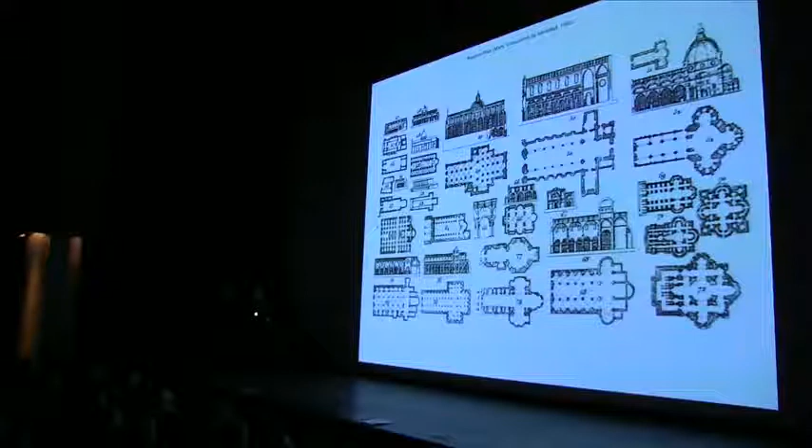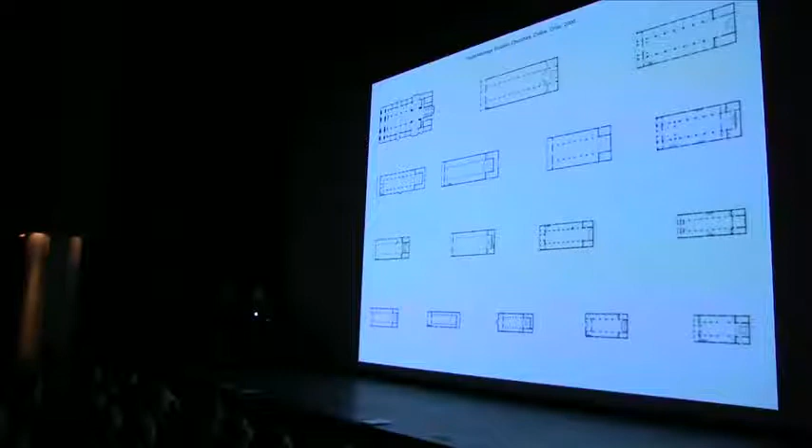And structures that are more about relationship than the shape in itself. Considering that space doesn't have any value in itself, you can define a specific structure despite the resources or the lack of resources.

And in theoretical terms, that's something very connected to a more topological understanding of space. So it's not descriptive, it's not analytical, but basically the definition of a relationship, which is very much part of our understanding—this childhood, or infantile, understanding of reality.

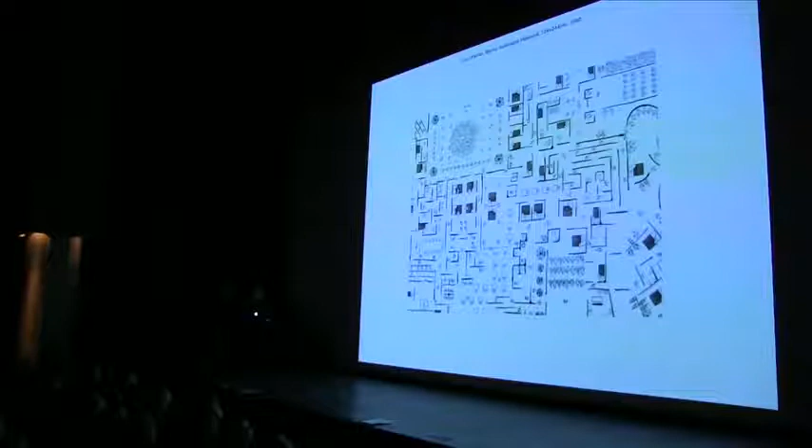For example, this is a fragment of a work by an Argentinian artist, and we would like to depict our project in this way, because there is a clear coincidence between the method of production and the subject being depicted. There is something very precise within the informality, and perhaps this conflict between what is defined as form—which is something very rational—and the irrationality of the occupation, similar to the image that Kirsten was commenting on.

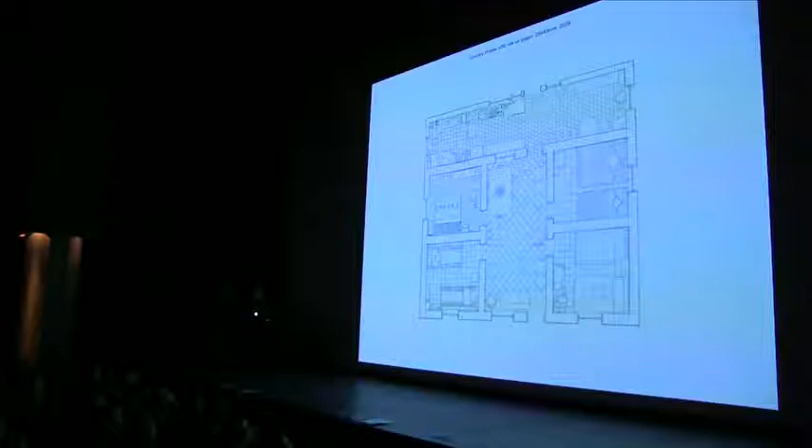What we call the New World is a superimposition of lots of influences. They're all simultaneous, they're all as important, and they're all coexisting. So we're always dealing with this. You Europeans are very lucky because you have grown those models over time.

Or the opposite direction, which is a bottom-up translation, where we take images from precarious contexts and have students in the United States learn from a new set of values that they don't normally work with. In this case, this is an exercise of documentation of domestic architecture of living rooms.

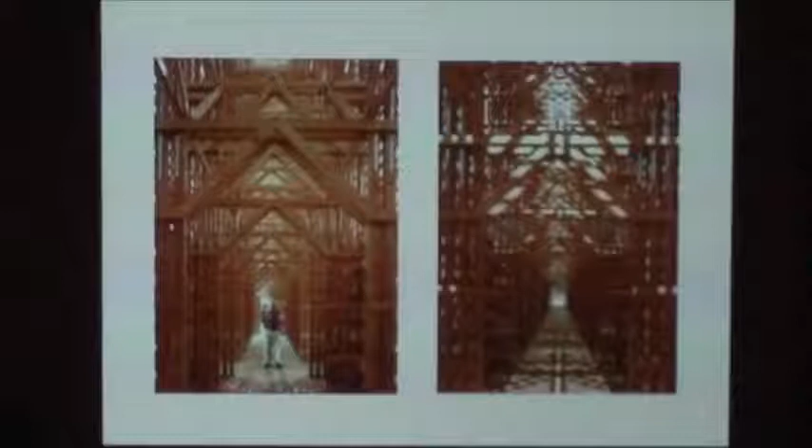The structure is organized in 5 levels, decreasing as you go up, and it was all covered with the same texture and some stones in the base that make it very, very stable. It's a very perfumed and shady corridor, almost a chapel-like interior to cross the highway.

This is a more recent construction in London. It's an exhibition precisely about architecture, paradoxically trying to avoid the representation of architecture in a place that is very representative in itself. So our proposal is...

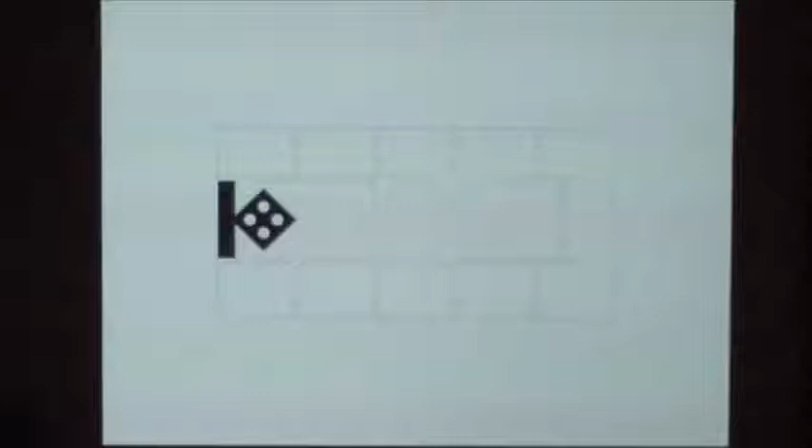A very primitive building type: a series of cylindrical columns and a horizontal plate, a mixture of a hut or a belvedere, a baldacchino, with a minimum amount of space between the legs. It occupies one of the largest rooms in this classical building, with a very simple alignment to the central axis - an object very compact, with 4 columns supporting the horizontal plate.

Inside every column there is a staircase, so you can access the platform through these spiral staircases, and there is an additional circulation, a promenade against the back wall. The piece is rotated in relation to the rectangular room, creating a distortion of the perspective, but also a distortion of the scale of this object.

Once you are on top, on the platform, this is a hidden space, a hidden room, where you're in connection with the vaulted ceilings, the skylights, the angels and the decoration on top, with no relation to the lower stratum of normal movement of that gallery space.

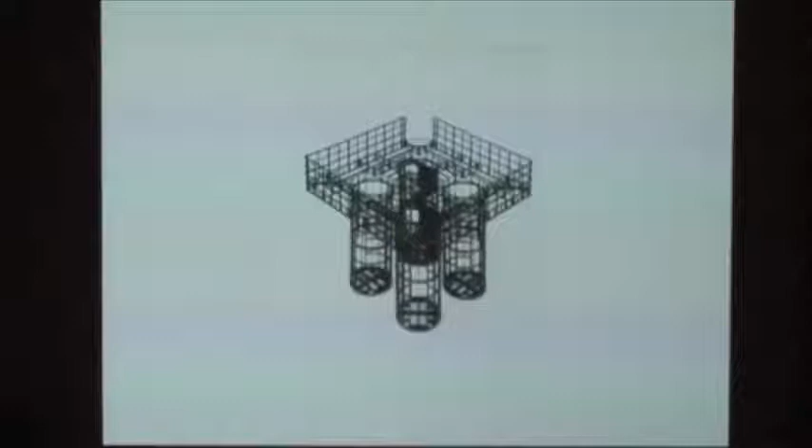All of this was prefabricated with pine wood, simple wood, in Chile. It was then shipped in 2 containers, and we went with the same carpenters we always work with to assemble it in London. So it was a non-fictional assembly - exactly as if we were building a house in Chile.

It was not representing anything scenographic. It was in itself a house within the museum. Then all the efforts are hidden - it's all covered with boards, simple pine wood, and doesn't show any indication of actual scale or effort.

It's a simple action, a repetition of a minor gesture. We're trying to avoid this notion of a grand gesture or a partie, or anything that can predefine the execution of a work. So finally, the work is an addition of tiny and almost minor decisions that are then interrupted at a certain moment because of something that occurs.

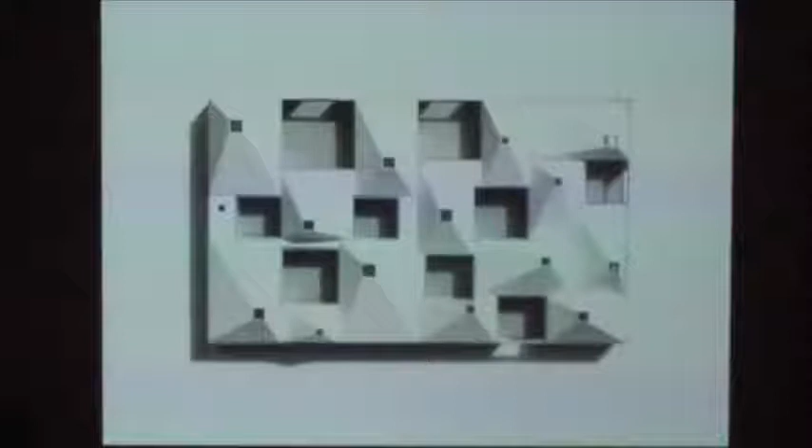So it's a large house, but it's actually the addition of small individual rooms, some of which happen to have a roof and some don't. So they capture in those patios existing trees and existing parts of the garden. That creates a sensation of sequences or alternating spaces inside the house that are always interior, exterior, interior, exterior, and give a larger sensation of space.

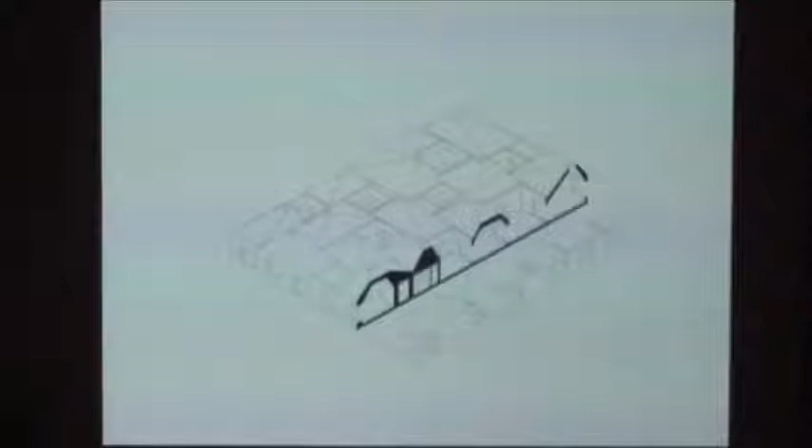And that sense of generosity as well, it's in the section. We increase the height of some of the rooms, so they are equivalent to two stories, but then in order to avoid casting shadows in the patios, all the roofs descend towards the patios and towards the exterior perimeter. So there is an articulation of two geometries, the geometry of the ceiling and the geometry of the roofs, that are adapted to the furniture and the different activities inside. So that creates a very varied temperature of light inside at the same time.

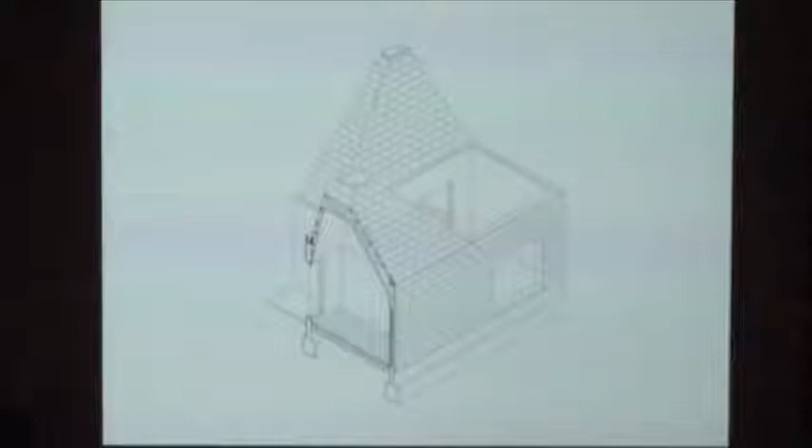And then within the house, all the different geometries are unified by this blanket of tiles that are just on top, and that were placed very rapidly. The only handcrafted part is the joint in the corners, where they were just cut.

And this is a bit the way we work, which is with a criteria. This was the only plan that we had on site for the carpenters to build the trusses. So they knew the criteria, they knew the levels that they had to reach, but every single truss was then different and was entrusted to the carpenters.

This is a drawing that was a documentation. Once they were built, we sent a German intern to draw what they had built.

So the elements of the project are this fence, the brick fence, the tiles, the green nature in between or inside the house. And then we received a drawing made by the owner's son, and we were very fascinated by the precision of his perception and his mental image of his own house.

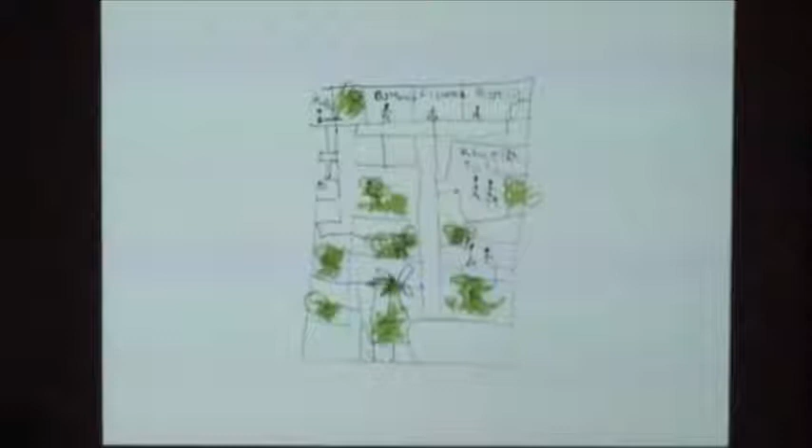So we have been for a long time trying to understand this conflict of up to what point architecture can be abstract and an artifice, an invention, and at the same time be perceived with a certain degree of naturality, or as something very familiar and easy.

This is a project we did very early in our practice. It's on the coastline, in a peninsula that runs parallel to the continent. It's running north-south. The project is located to the west, facing the open ocean, as a final point of a natural promenade. So the site is surrounded by water on 3 sides.

So the building is a very compact piece, almost as if it was abandoned there. But it occupies a very precise position, far enough from the edge to be on safe ground, but close enough to the edge to be able to look down and see the rocks and the waves.

The plan is organized: it's a double perimeter wall and then a cross inside. And this is so because it is both a private house, but it's also a small cultural center that receives artists in residence who stay there for a while. So it has this function that has to be somehow more domestic and other times more neutral.

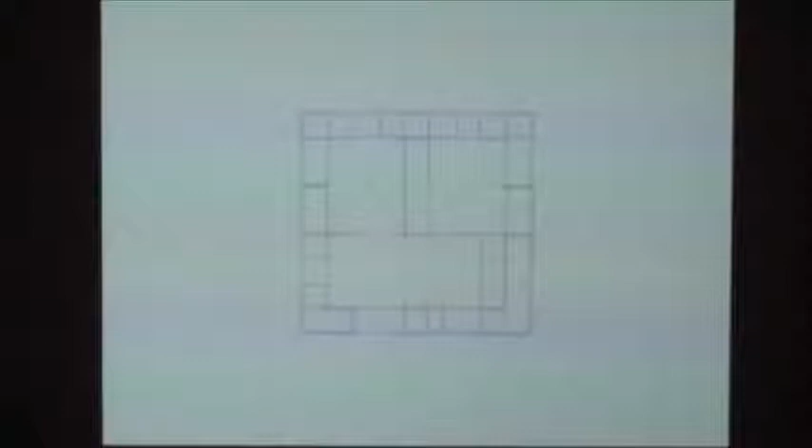In that perimeter wall, in that double wall actually, you have all the programs that are kitchens and bathrooms and closets, but also more architectonic programs such as staircases or balconies. And that allows for the center space to be freed — everything can be stored in that double wall.

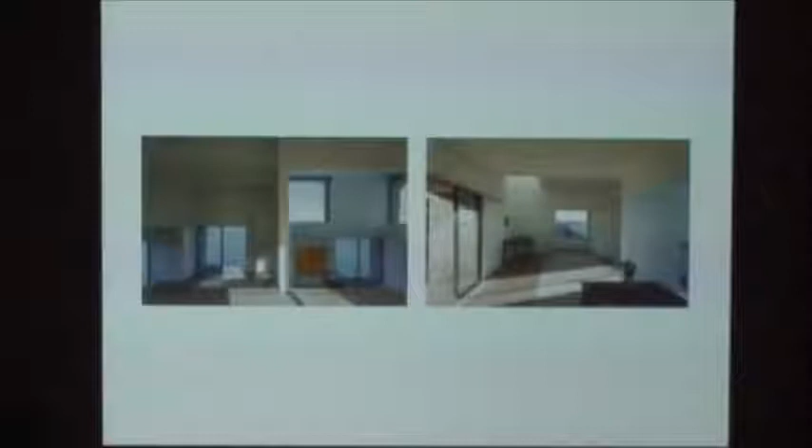So there's a very different perception of the thick mass created by the double wall, and then a very informal interior space in between that has always cardinal connections across the space with the landscape, but also, because there is a difference in the levels of the floor, it connects diagonally to some vanishing points with rocks or with the coast around it.

So the surrounding landscape is really a reconstruction of fragments, a mental reconstruction, as you go through the house.

There is perhaps an obvious opposition between the abstract geometry of the piece and its wild nature, and a certain continuity between the granite of the rocks and the concrete. But we were interested in this cubic format because of this sensation of rest and gravity that is very attached to the ground, as a positive piece in a negative, or the opposite, a negative piece in a positive landscape.

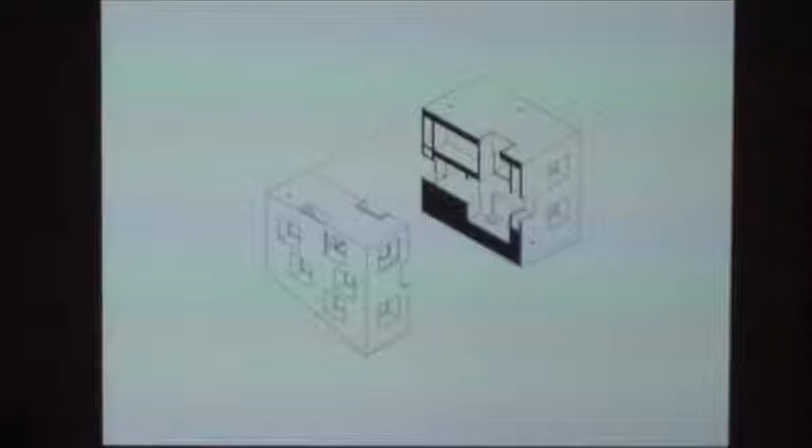Without any mediation, it's directly transferring the loads to the ground. Inside this monolithic and compact piece, there is a continuous vertical space, a void that functions as a pivoting point, pivoting room for the interior, and it somehow captures a sense of vertigo of the cliff. It was built very, very simply.

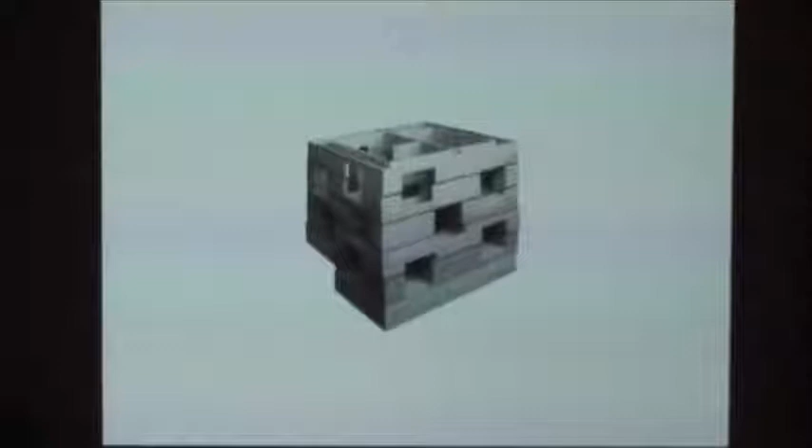This is a very ugly model, but we like it a lot. And it's essentially 7 stratums of concrete that were poured simultaneously. It was built by the local fishermen and farmers, so it was a technology that was absolutely nothing new, all with wooden formwork that then was recycled and used inside to cover the first exterior wall with a little bit of insulation, and then just white paint unified all of the interior.

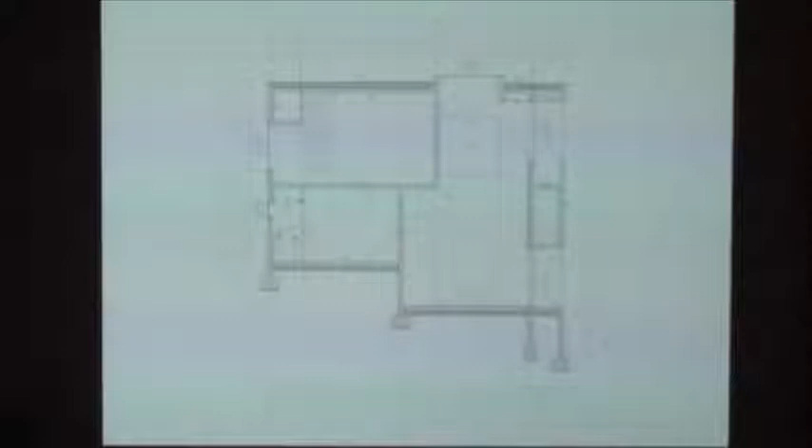So it's just 15 centimeter thick concrete walls and slabs, and then 2 very simple details: windows that are flush with the facade, and others that are receded and create protection from the wind in the winter, but also balconies in the summer. It works really well as a residence. It's already building a collective memory in the area, but it also introduces a human scale to that context. It's a very idyllic context.

Something that we have been exploring also with more suburban houses and much less idyllic contexts. These are houses that also explore the same notion of seclusion, compactness or autonomy, but trying to capture a little bit of the everyday beauty that you can have around them.

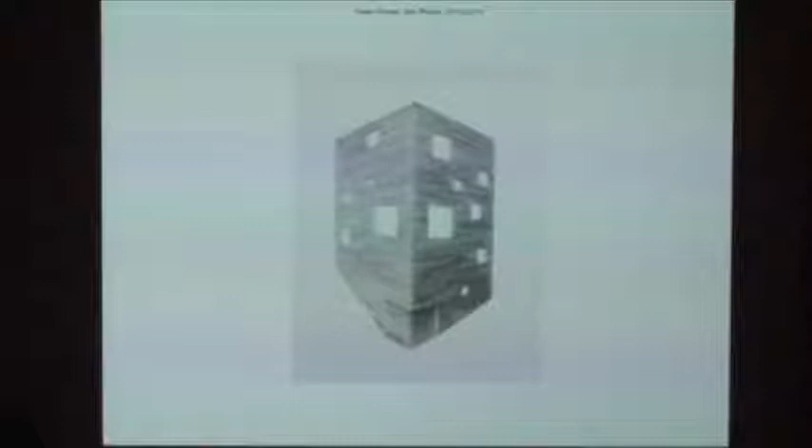So in this not so idyllic context, our position is very simple. It's basically the definition of a perimeter, of a line that defines a degree of transparency, and it's somehow elusive in the way of almost as a mask for what the interior space is. And this is connected with a series of portraits we're doing, which are a single line that defines the profile of a head, that then is repeated as an offset.

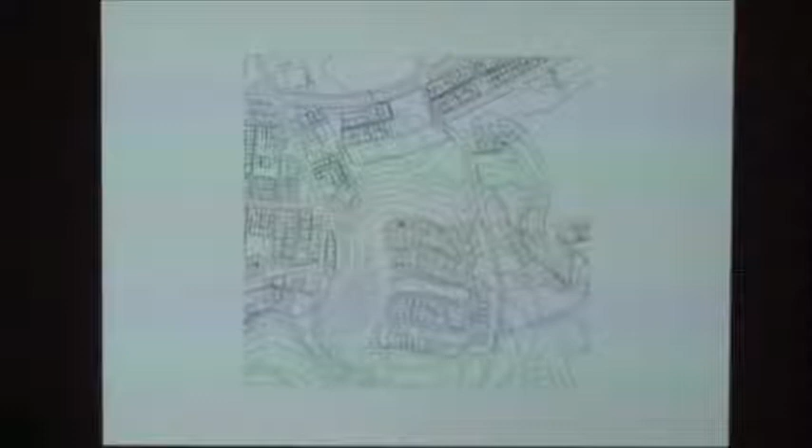And we find that in a suburban area, the limit that surrounds the interior is somehow doing the same function. So the context is very generic. It's this brand new suburb in a brand new city. It's just a topography without any tree. And the house is a compact piece, a 4 stories wooden box, very closed and somehow hermetic to the surroundings.

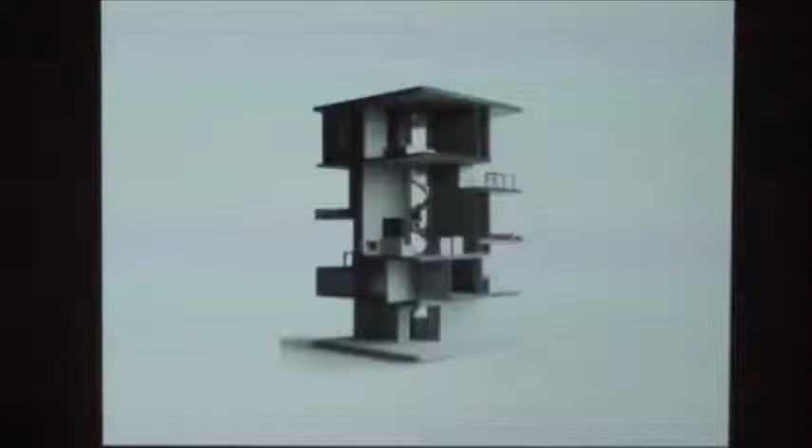But that compact figure is completely different inside. It's 15 platforms that rotate around the center. Each one is separated 70 centimeters from the other, so that's 4 steps. And it has a plan that is organized. Of course, here you see only 4 plans, but it's actually 15 different levels, which form a cross, an asymmetrical cross that holds all the fixed functions.

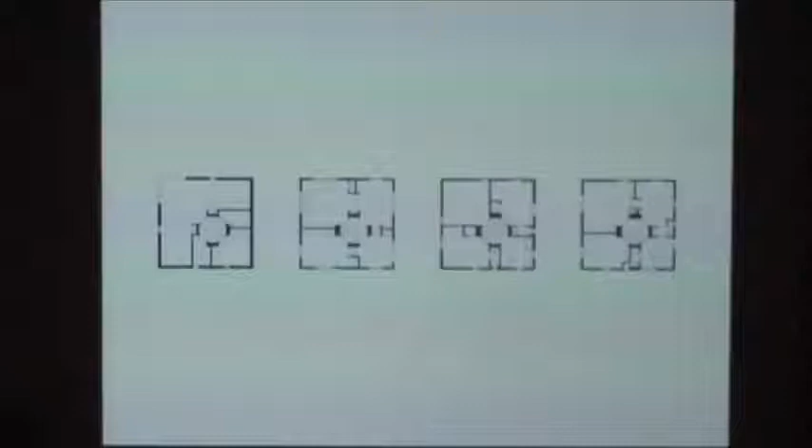And then at the crossing point of that is a staircase that connects all the rooms. So that staircase acts as a central core and an access to every room, but there's a secondary circuit you can take through the middle point of the room. So there's a short promenade and a longer one. And that same staircase allows for different views of the different levels, so you can connect diagonally through the whole volume of the house and have a perception of a larger house than it actually is.

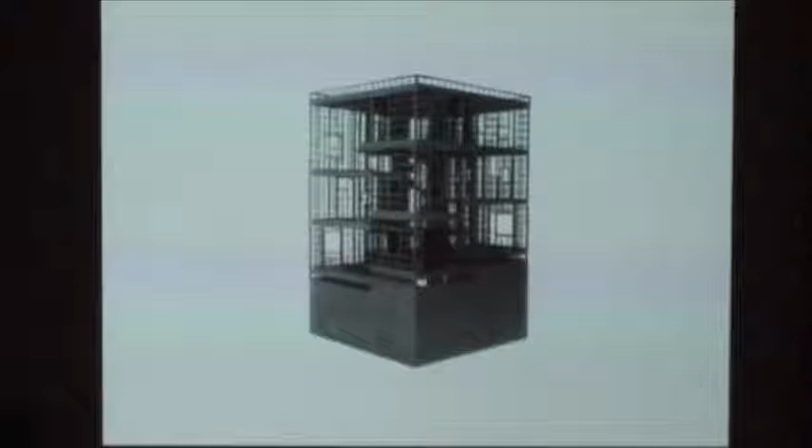The construction isn't so complicated. In fact, it follows the form. It's a balloon frame construction with a concrete core for the staircase. It's a monolithic piece of in situ concrete for this spiral staircase that doesn't have any landing. All the steps are exactly the same, so the staircase occupies exactly that center point, and there's also a void in the center with the total height of the volume.

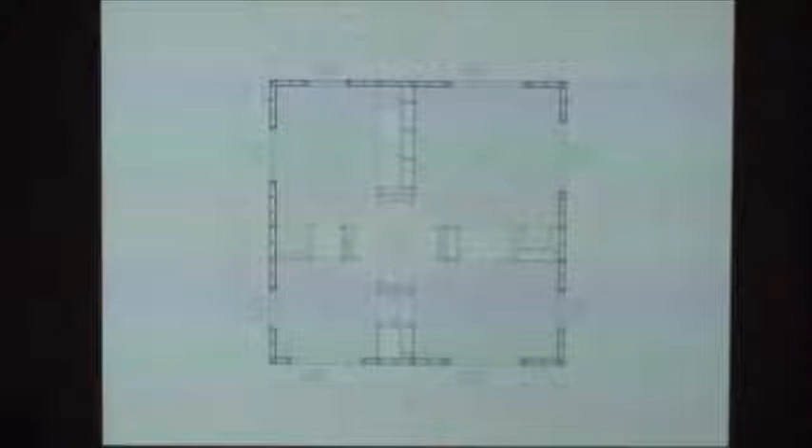Everything is made of wood, so the rooms are almost a continuous furniture of untreated pine wood. The same happens on the outside - it's a ventilated facade, in this case just impregnated wood, standing there on some leftover site, as opposed to the other houses, which are the same size but very obvious in their functions. They're very transparent about what is happening inside them.

This following project is more not so invented, but more dramatic. It's a project for some friends who lost their house in the earthquake that we had in Chile. It was very delicate because we were asked to do a reconstruction that was material, but at the same time a mental reconstruction, which is something very demanding, to have that kind of questions and dilemmas at the beginning of a project.

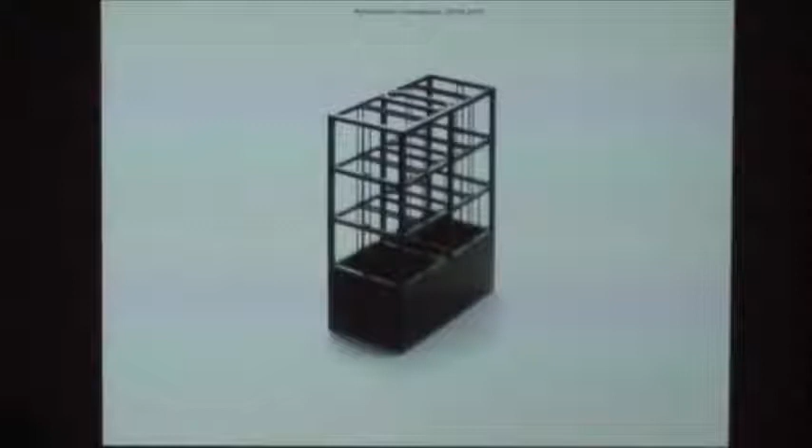So the construction is basically the structure that is there as an exposed finishing, in a very simple and stable manner, almost as if it confirmed that famous sentence by Simmel - architecture considered as this meeting point or equilibrium point between the human forces and natural forces, which are different vectors.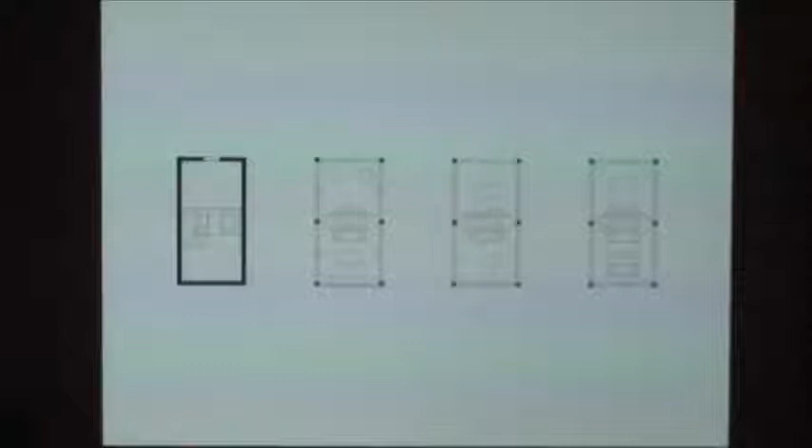It's 8 equivalent rooms - 2 of them are in a blind podium that takes the topography, and then 6 of them are in a crystalline tower. The staircase is linear, in the center, and connects all the levels with absolutely no doors in between.

So in the very narrow spaces, the privacy is regulated by a couple of layers of curtains. But what we like most is that when they're completely open, these curtains replace the black bones of the structure with these soft pillars of cloth. And the structure doesn't show any effort.

The columns and beams are exactly the same, 25 centimeters in steel, but there is a physical condition - they are different in every level inside, because the thickness of the steel is different, going from 10 millimeters, to 8, to 6 millimeters. So there is a real entasis inside, but it's not visible.

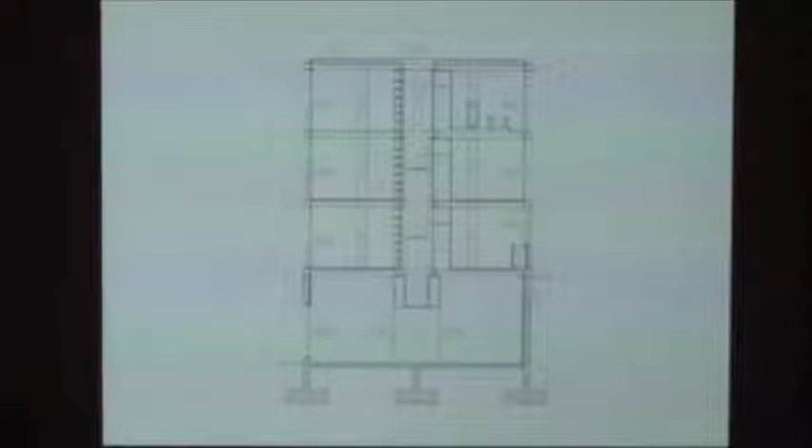The construction is very simple: a steel structure with 5 centimeters of wooden floor without any structure, and then a couple of details for the openings, made in situ with steel angles for the fixed panel and the pivoting panel. Everything is painted black, the concrete and the steel. So it has this infrastructural presence, with elements that are perhaps too thick for the size of the house, or too slender for concrete. So it's very undefined.

The next project deals with something much more internal, as an internal problem - basically the systematization of a geometrical rule, which is the implied diagonal in an orthogonal system.

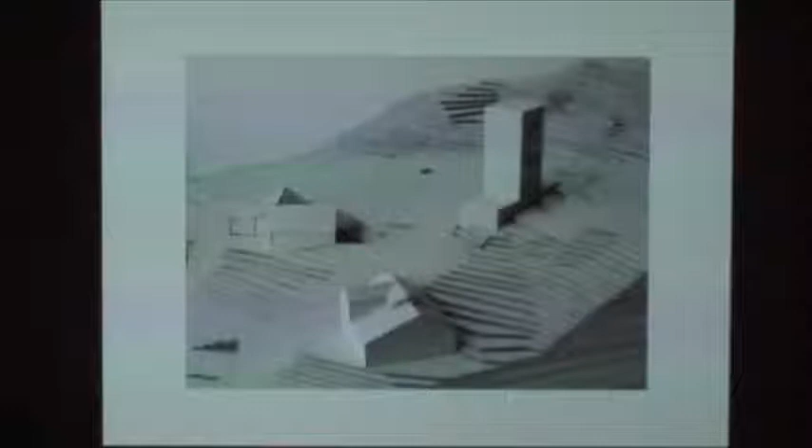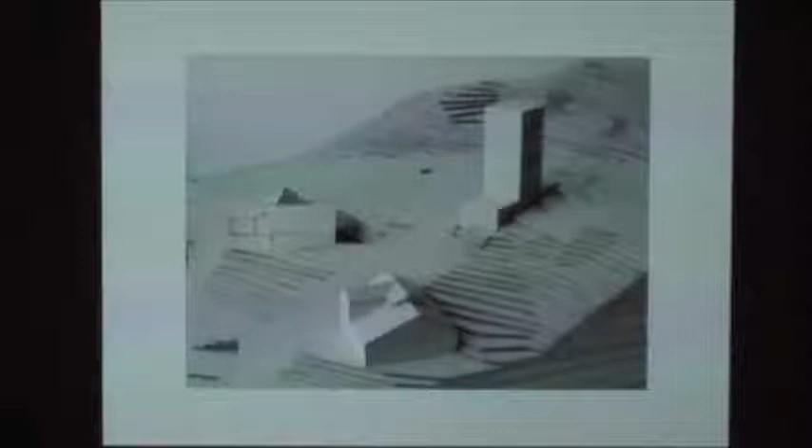The house that Sofia was just showing can be explained maybe with 3 coincidences that we like. One, you enter from behind into the house from the street, and there's a long staircase there - that's the first thing we liked. The second is a coincidence with the levels - it's called Cien House, 100 in Spanish, and the podium is exactly 100 meters over sea level. The third coincidence was a very beautiful old cypress tree right next to it.

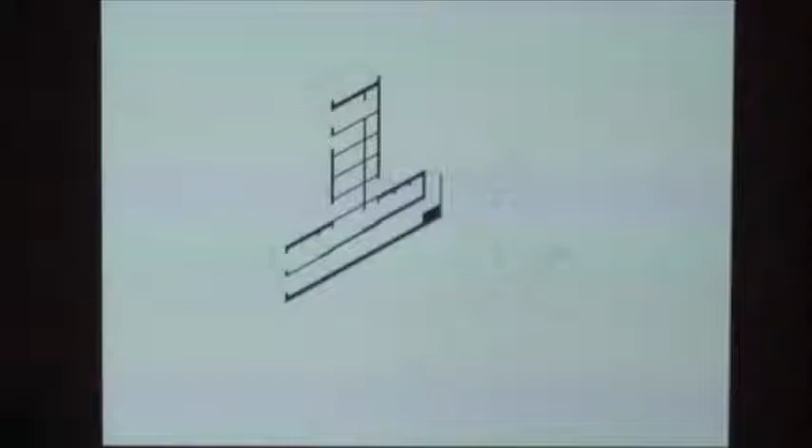It's a building that articulates two formats - a vertical and a horizontal, a tower and a podium. They're fused, so the podium is very much in relation to the ground and is an extension of it, but the tower on top has distant views all the way to the ocean. It also articulates three programs: a workshop in the lower level, then 3 levels of a house, and on top 3 levels of an office and a terrace.

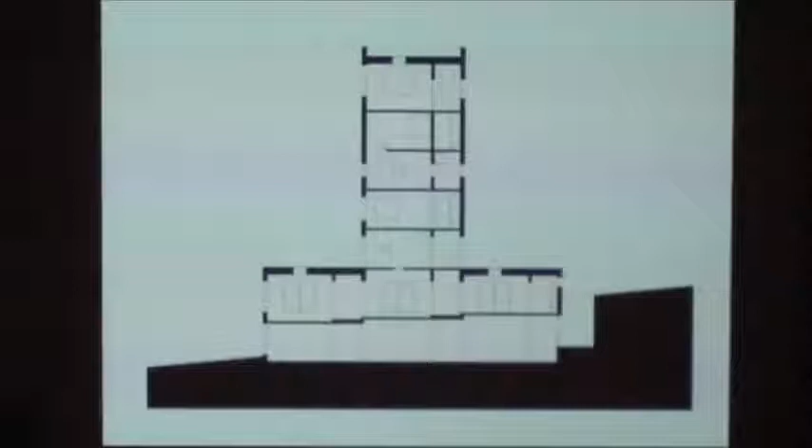There are two independent circulation systems. One goes straight from the street at the highest point up to the tower, to the working space, and another is an exterior staircase that goes down and connects internally the house with the workshop in the bottom.

All the staircases are really shortcuts, extremely efficient, and ironically it's cypress stacked up, as if we're dialoguing with a cypress outside. But it's with no rails—actually the center core is the rail to the staircase.

The plan of the whole house is a systematization of that Euclidean geometrical figure, which is like this asymmetrical cross in a square. So it's a repetition of 12 times the same figure that is then diluted by pragmatic reasons. In the podium there are 6 modules, and in the tower 6 modules.

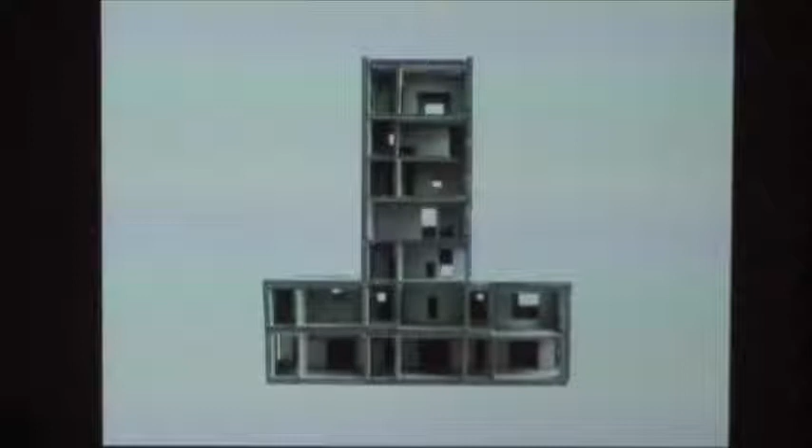Since the topography is left untouched, the total amount of levels is visible in the back garden, and from the street it's totally hidden.

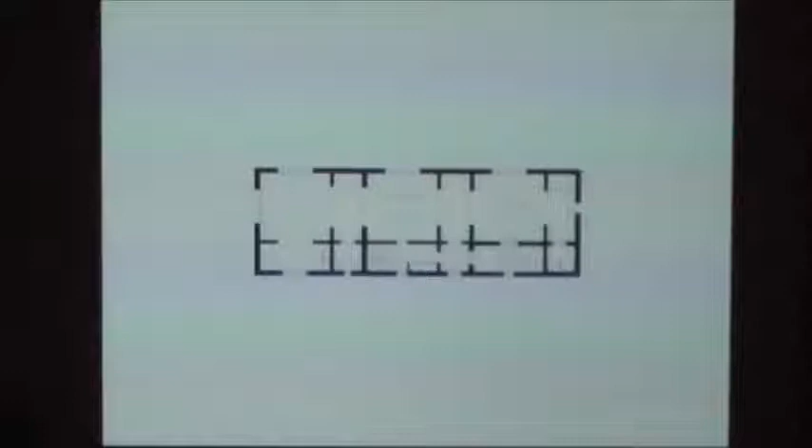That's the social area of the house, and you can see 3 modules there in the floor plan that are open in the center, with the openings aligned. Since there are certain steps, the openings are different in one extreme and the other, and that creates a subtle distortion of the depth of the perspective.

As opposed to that extended floor plan, the tower is extremely compact. It's the same structure, but the relation of the spaces it articulates are always different. If you look at the last 3 floor plans, the first one has a diagonal connection from the staircase across the totality of the volume.

The next one has the longest possible path along the edges, or the top one is connected cardinally through the space in the center of that main room.

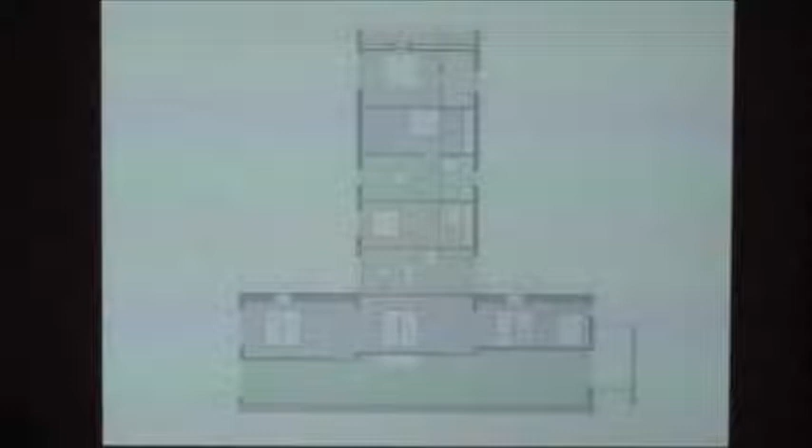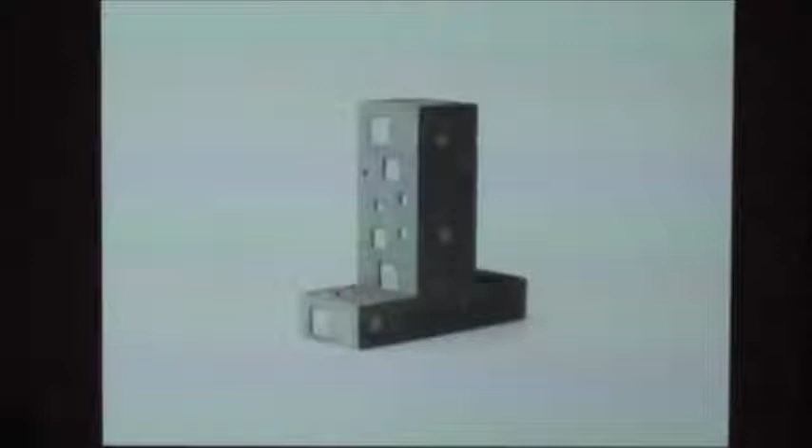So it's a concrete building with a wooden house inside, all covering the walls. The outside is a monolithic concrete poured in situ. What we were interested in were the levels of concrete, not the texture of the formwork. So a slight demolition gives it this quality of very soft edges.

It occupies a peripheral situation in the city, but it also has a diffuse presence. It's maybe too tall to be a house, but also too small to be an office building.

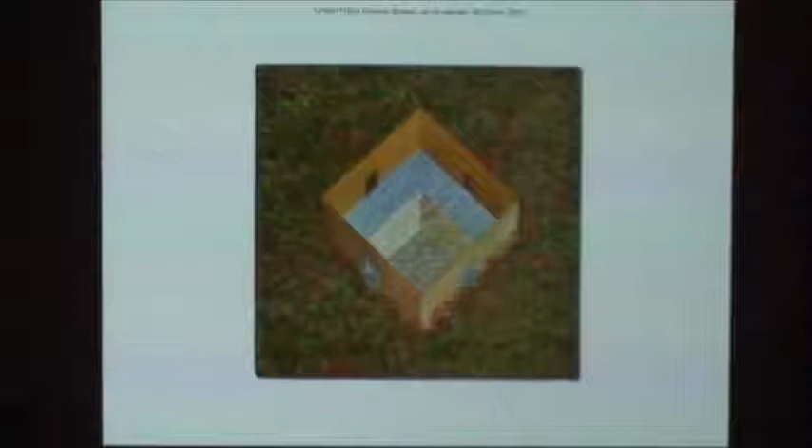This is a more recent project. We were painting this at the same time, and we find a perhaps beautiful connection between the painting and the project, because there is a degree of autonomy of what is depicted in the center, with the symmetry and the regularity. But at the same time, you cannot understand it without the context, the specificity of that relationship.

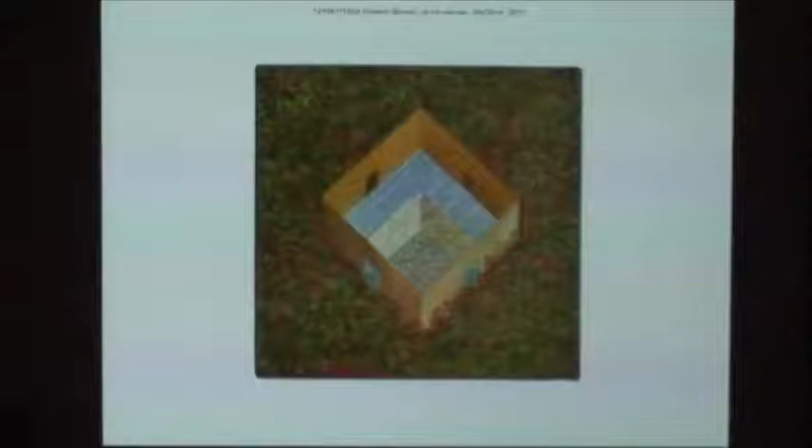It is a house in Spain, on top of a hill. It's a very gentle hill, and there is a very precise definition of the way in which you approach the piece from the foot of the hill.

There is the parking, and then there is a linear ascension from one moment to the final destination—that's the house on top of the hill. And as you can see, it's all covered with a dense forest, so that ascension occurs under the trees, in the shadows.

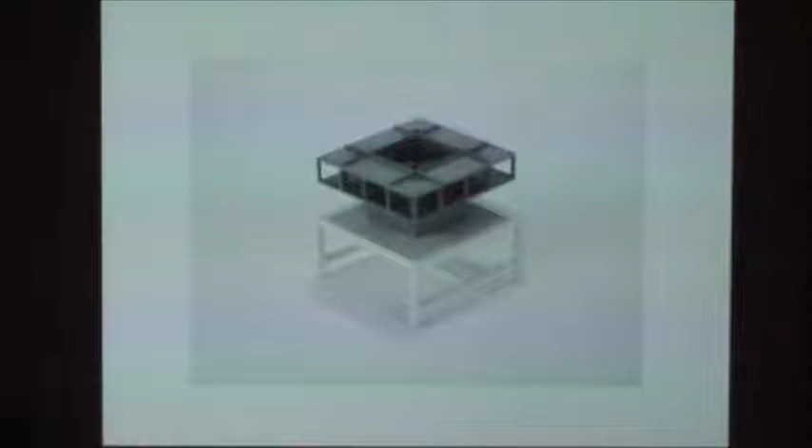And somehow the house is the end point of a journey. So it's at the same time a suspension, not only of the piece in its relation with nature, but also there is something with the temporality of that linear experience and then the centralized experience of the interior.

That's the final point of that arrival, which is very demanding, especially after 100 meters of a staircase. And then at that point you have to make a decision of entering by the corner, and there are two doors that arrive at the same place.

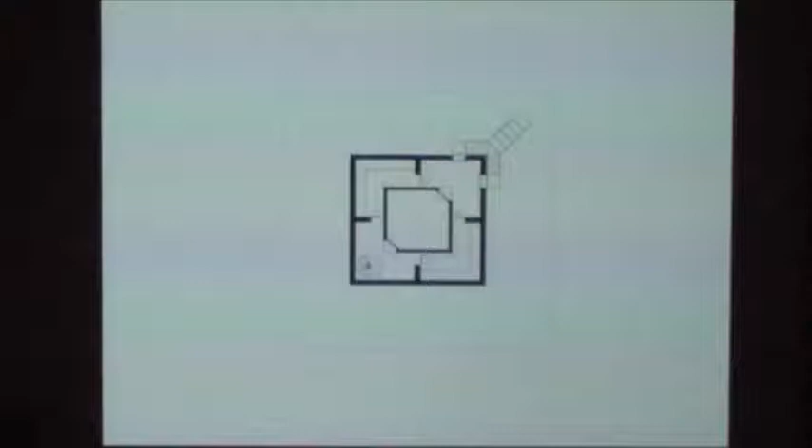There are two windows in the swimming pool, in the volume of water, so the light inside this cave-like space is almost blue and green. But also, as you go through it, you suddenly encounter in the water, in a voyeuristic way, the bodies that are submerged of other occupants in the house. And the format of the house is very schematic.

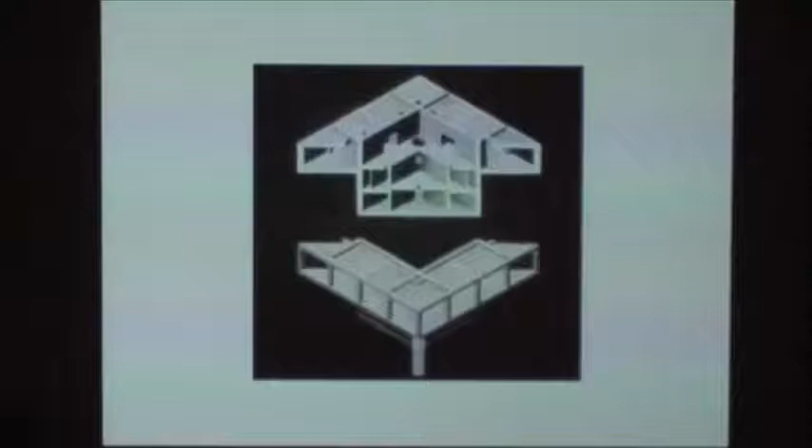It's a blind podium with an open and transparent platform on top that contains a patio, an open room that has the same size of the podium. The floor plan of the platform is basically a centralized structure with water in the center, a spiral staircase in a corner, and a very closed room in the center with punctual openings.

The perimeter is basically punctuated by 16 columns. So on every side there is a room, an independent room that works as a pavilion, as a glass pavilion.

And in the corners there are protected terraces in every one of the four corners. So the only proper room of the house is the patio, but obviously it doesn't have any roof. And the access to the pavilions is through a thick wall.

It's perpendicular to the landscape, and the pavilions have this proportion that can be extended to the corners with the thick wall that is lateral to the central patio, as a functional width.

So we could understand this house as a panoramic rotonda. It's equivalent in all its sides, so it transforms that linear voyage of arriving to it into a three-dimensional sort of experience of the landscape around.

But also the activities within the house can move and follow the sun or the absence of sun, depending on how people want to live. They can occupy the four corners of the four pavilions and shift around the house.

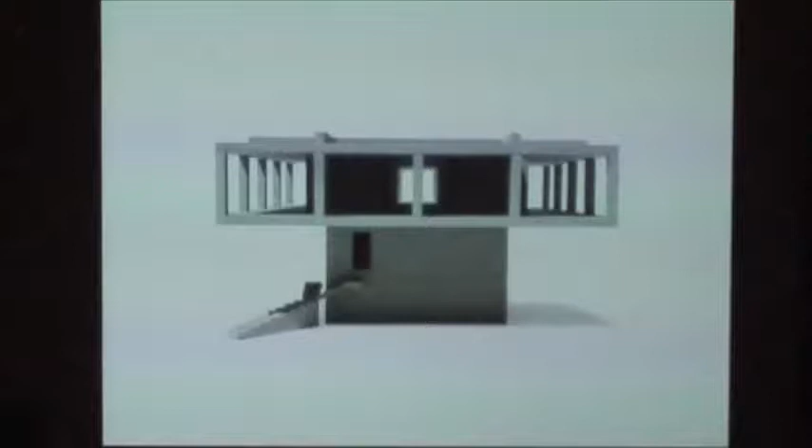That space around it is very narrow, so it's almost like a balcony. It is pushing you outwards, and that happens in an even more clear way.

Those big panels of window can slide and invert the relation of what is interior and what is exterior. So the corners can be closed and the center pavilions can be open.

That's a technical floor plan. The only distinction in material is that the courtyard has Portuguese tile and the rest is a very simple concrete floor. But it's all in situ concrete.

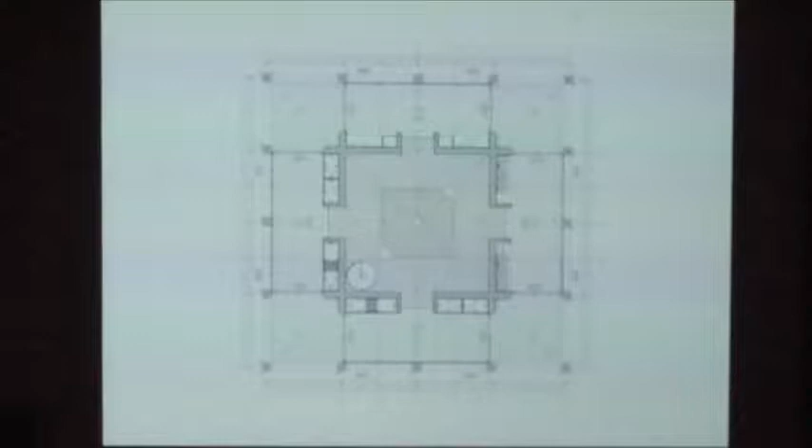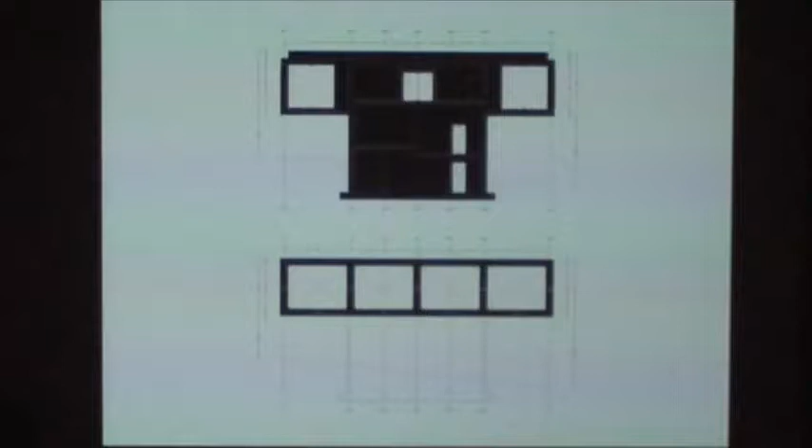What helps all of this rotonda cantilever is actually that the walls of the patio are extended and they make these Vierendeel beams on the four sides. So actually, when you see this pillar, it's not actually a pillar, it's actually a tensor.

There is inside a metal structure that pulls all the forces upwards and back into the courtyard and down into the earth.

So the house is floating, suspended in the landscape with the company of this old tree. And we're always very aware of these invisible things. We want to, in a way, understand that there is a physical presence of things, but there's also a mental aspect of them. And hopefully we try to connect with those two aspects in the work we're doing.

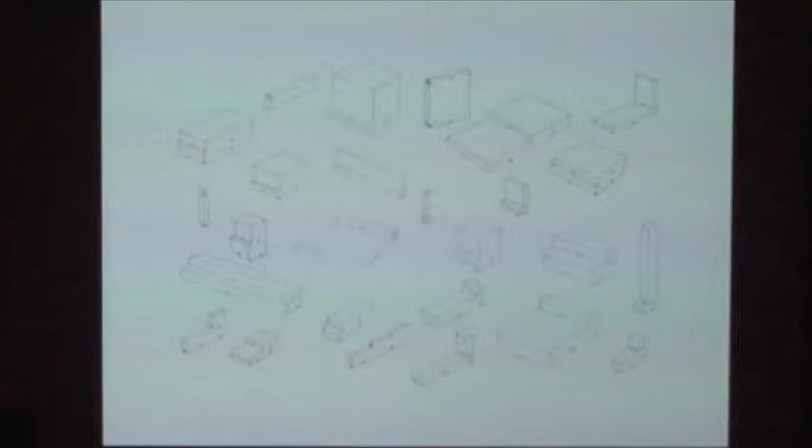And this is a current project. We're working on a series of paintings that in fact give the name to the lecture. We're really fascinated not only by the notion of format as a method, but by the notion of limitation, of something that is finite, in terms of being able to restrict the amount of formal attributes of the elements that define the spatial structure. So it's basically a series of studies of basic forms.

In this case, for example, this L shape with 7 openings and with rectangular or square openings, with 5 sides, with 2 levels. It's so simple, but we wanted to know how different and how diverse the same figure could be.

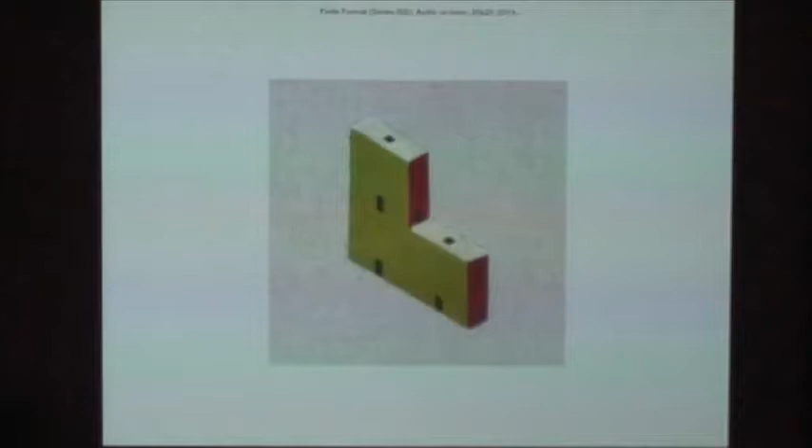So now we are working on, it's maybe a very obsessive and alienating procedure, but we're enjoying it, on establishing in these very simple figures a format that is based on, well in this case, 5 factors and 3 positions.

So actually we are mathematically exhausting the possibilities of this figure. In the case of these 5 factors and 3 positions, the total variations we can get is 243.

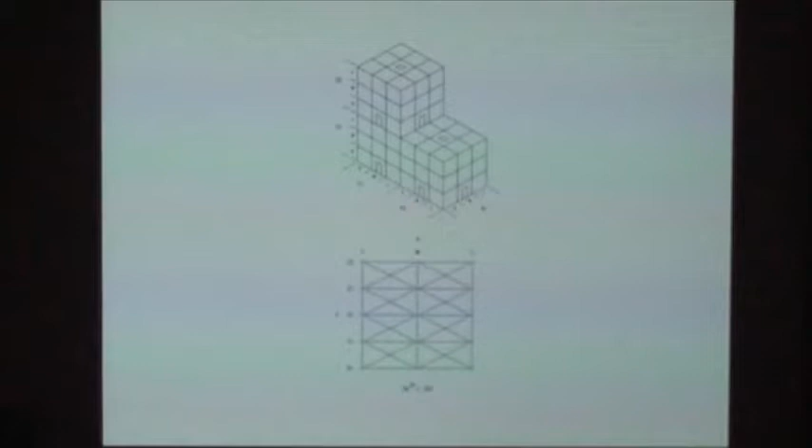It's just a combination of all of those, which then somehow we find fascinating, because just a slight variation of some proportion or the size of one element or one part of it defines a very different character, a very different identity for every single one of the figures, while they're still all the same.

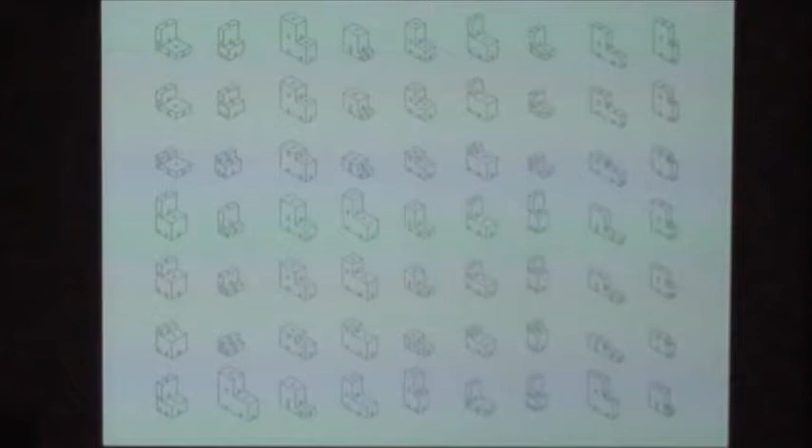Basically what we have been continually doing is repeating this obsessive manner, repeating every time more or less the same ideas. We truly believe that the understanding of architecture is based on the understanding of your own method, of your own shortcut to do and to produce what you do.

There is an Argentinian poet who used to say that in order to do art, you have to do always the same thing, but never in the same way. Thank you. Thank you.